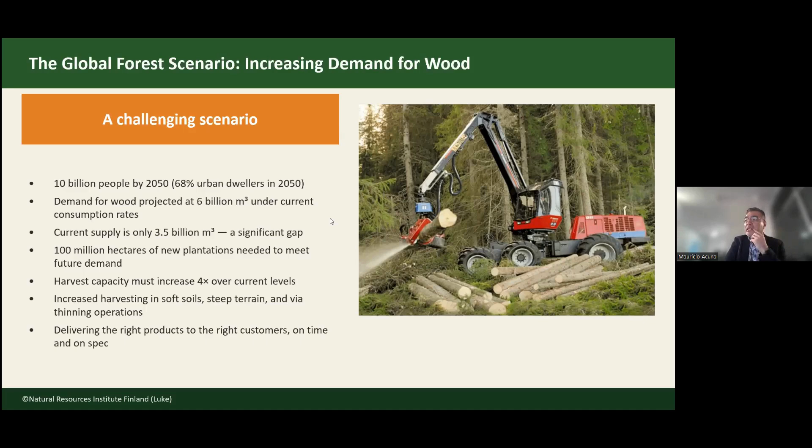We are also seeing some trends. For example, in some countries we are seeing more harvesting on marginal soil, marginal terrain, and steep terrain, and increasing thinning operations. So delivering the right product to the right customer on time and on specification is becoming even more challenging. The person driving that machine is actually making very important decisions. They have to be productive, efficient, reduce waste, and maintain the sustainability of the forest operation.

I'm not very familiar with the forests in Thailand, but in Australia we sometimes grow forests for 40, 50 years, and the challenge is how we capture that value 50 years later. So what is the current state of cut-to-length operations? Harvesters and forwarders rely entirely on human operators. They're labor intensive, sometimes inconsistent, and environmentally challenging. Forest value built over decades may be partially lost at harvest. That's why I said the job of the person driving that machine is very important.

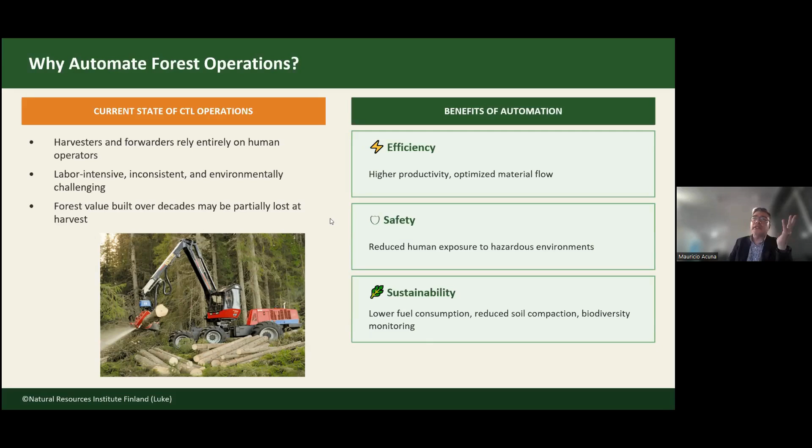So basically, the benefits of automation are exactly the same benefits as when we introduced mechanization in the Nordic countries at the end of the 60s or early 70s. We want to improve, to be more efficient, boost our productivity and optimize material flow. We want to reduce the human exposure to hazardous environments, but also from a sustainability point of view, we want to lower fuel consumption, reduce soil compaction, and improve our biodiversity monitoring.

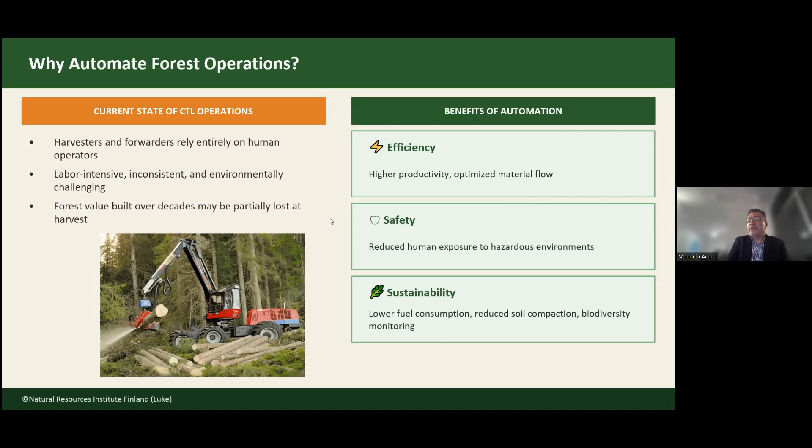And this is the situation of cut-to-length operations worldwide, globally. And you can see here that, of course, in the Nordic countries a big proportion of the operations are cut-to-length operations. We don't have Thailand here, but we can see Malaysia. I don't know if the operations in Malaysia are similar to Thailand, but Malaysia is very at the border nearly, so not a lot of cut-to-length operations.

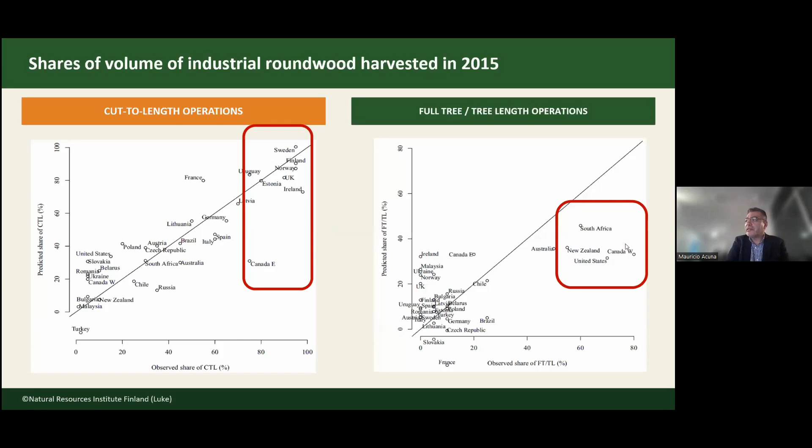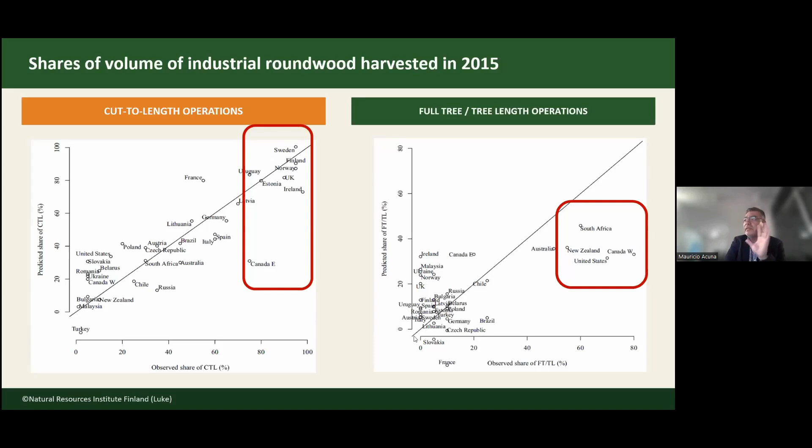And then we had full tree and tree-length operations. So again, at the top, in South Africa, New Zealand, the United States, and Canada, they use mainly full tree and tree-length operations. And again, we see Malaysia is also with some full tree and tree-length operations. Okay, but that's the situation globally about the share of cut-to-length and full tree and tree-length operations.

Now, Industry 5.0. So at the moment, we are living what is called Industry 5.0. But I would love to start with this figure because it shows how we have transitioned from the first industrial revolution in 1780 to the last one, 5.0. So you can see the first one was shaped by the use of machinery, water power, steam power. 120 years later, we had the second industrial revolution, basically consisting of mass production, assembly lines, uses of electricity.

Then only 70 years later, we have the third one, basically shaped by computer and automation. 30 years later, we have the fourth one, characterized by internet and cyber physical systems. And it took only 20 years to pass from the fourth to the fifth, which is now more characterized by human cyber physical systems. That's the current industrial revolution that we are living at the moment.

Okay, so the core principles of this Industry 5.0 or the fifth industrial revolution are human centricity, so humans collaborating with robots, not competing, getting the benefits from introducing robotics in the different production lines and systems. Resilience, so how we can use this sort of technology to make more flexible and more robust production lines. And in the case of forestry harvesting systems, how we can use this technology to make more sustainable systems, for example, with lower fuel consumption, with less waste, etc., and how we can customize solutions for different customers with different needs.

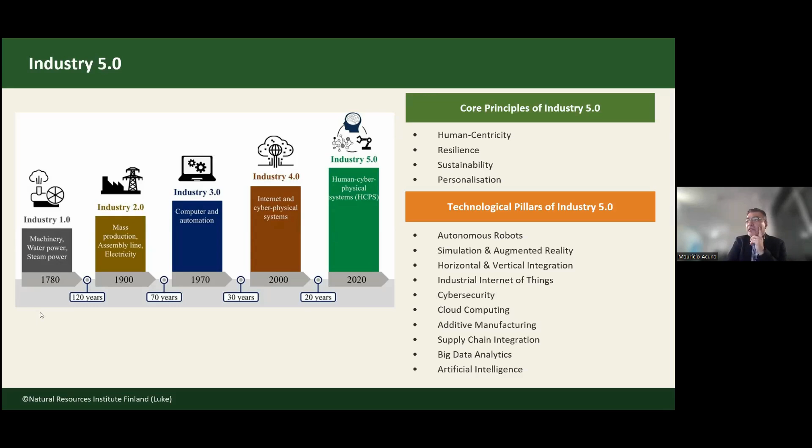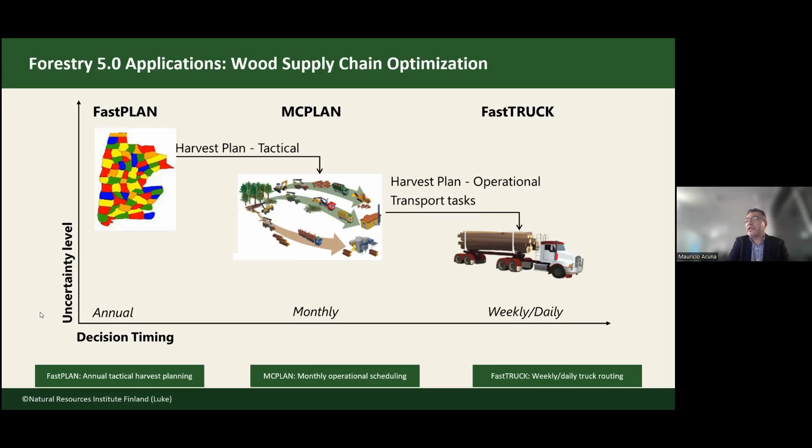And another tool that I developed when I was in Australia was FastTRUCK. Imagine you are a transportation planner. You have 50, 100, 200 trucks that you need to route on a daily basis. So you need to send those trucks to different coupes, to different forests, and then to different mills, in an efficient way. So at the minimum cost and satisfying all the constraints. For example, truck drivers cannot drive for more than 10 or 12 hours. Some mills are open only for a few hours. Other mills are open 24/7. So you need to satisfy a number of constraints with those tools. And here we have more information about the different tools.

So again, FastPlan: we are maximizing net present value because we are optimizing the cutting of those forest coupes, but also we are optimizing forest roads, when the roads should be built or improved to move the timber from the different coupes to the different mills. So you see here, the decision is when to harvest each stand or coupe. And the solution technique is a quite advanced meta-heuristic called threshold accepting.

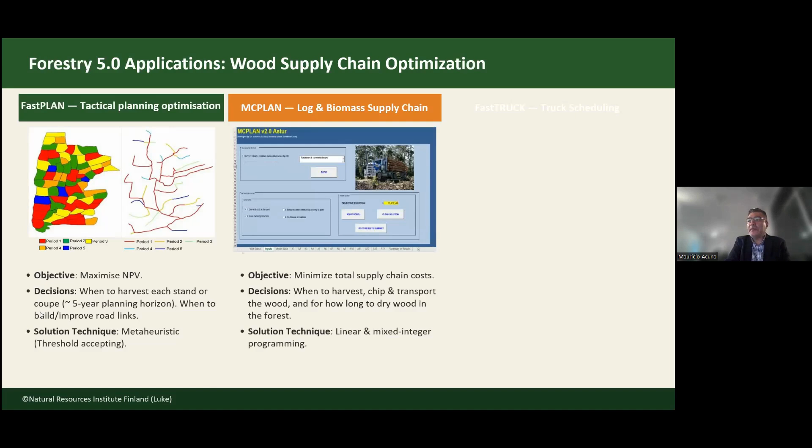This is the interface for MCPlan. This is an Excel-based tool. And here we want to minimize total supply chain costs. The decisions are when to harvest, when to do the transport, and for how long to dry the wood in the forest.

And the solution technique is linear and mixed integer programming. And FastTruck, that's the interface. And we want to minimize costs or empty truck distance. There are different metrics in transportation. Decisions are how we allocate the trucks to different transport tasks, and the solution technique is simulated annealing, which is

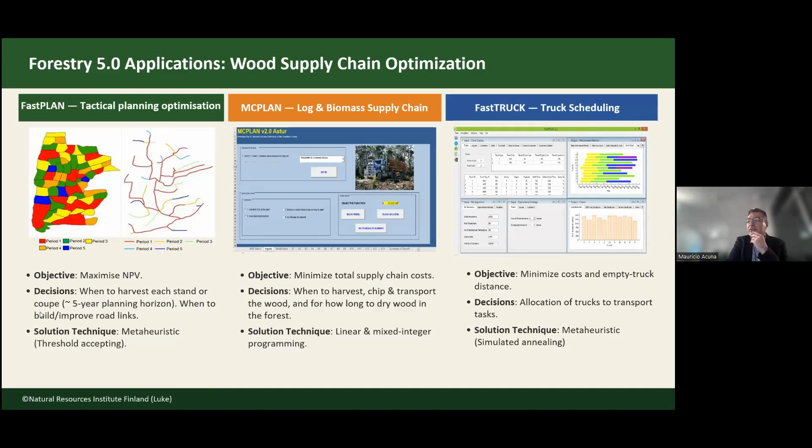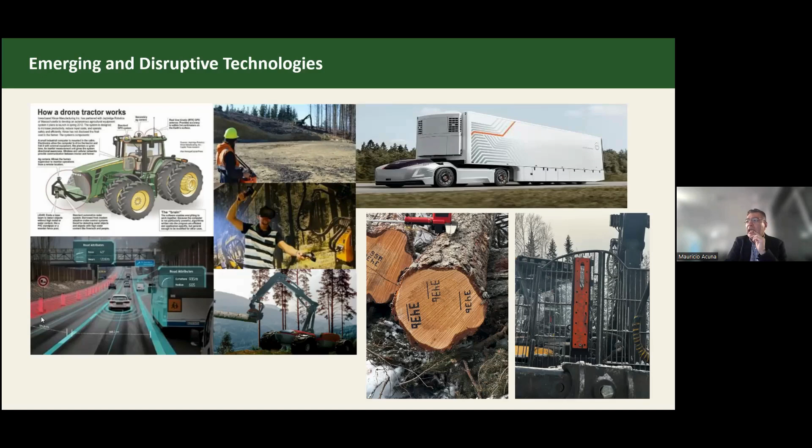But also a few weeks ago I went to Sweden to see a new system for tagging logs. This is a digital printing system. The difference is that it could be located on a forwarder. So basically, when the operator grabs the logs, he can tag the logs in the forwarder. And this information could be added to the HPR files. So you know exactly where the log was tagged, you know the location, and then you can identify different logs when they arrive at the mill based on that information.

But before the company purchased those systems, I offered a different approach, a different solution. I said, let me fly a drone to see if I can get a 3D map of the logging trucks, and if I can do the same job. I was able to do the same job. Unfortunately, my system wasn't in real time. The company needed something in real time, very quick.

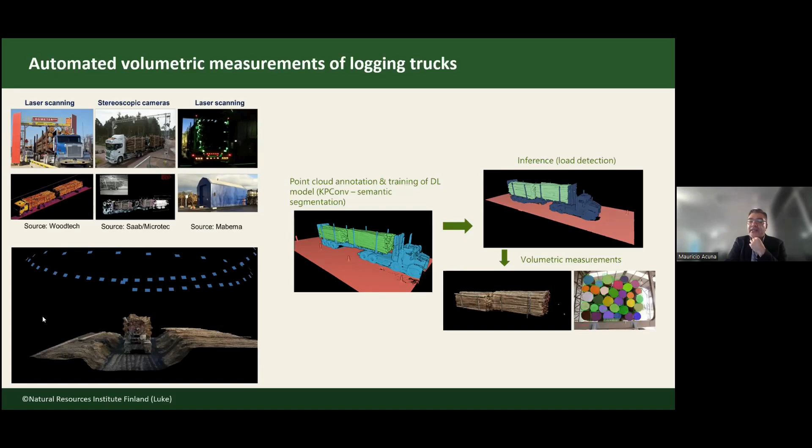But at the moment we're writing a paper with my PhD students, so we are now using deep learning to identify logs from point cloud data, as you can see on the right, and now in a few seconds we can identify the logs and estimate solid volume and gross volume using deep learning and point cloud data. So we are moving quite well and quite fast in that field.

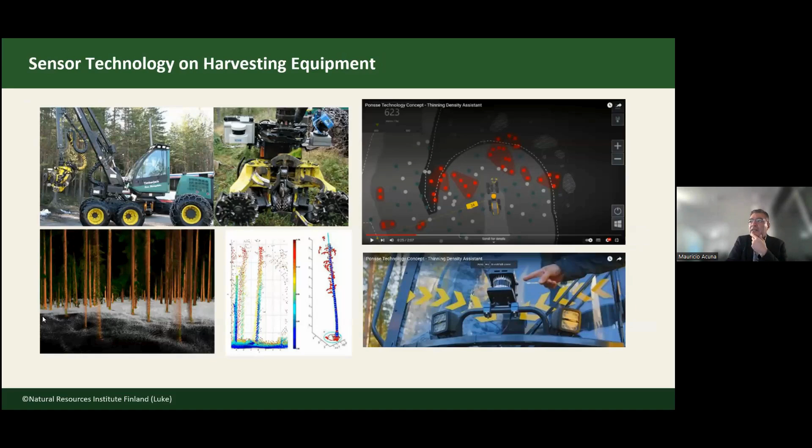So we purchased the Kudan system, and we put the LiDAR sensor on the machine, and we've been able to do this kind of thing. Of course, we are a bit behind the commercial systems, but we've been trying to do something similar in our own research. But also we propose a second approach.

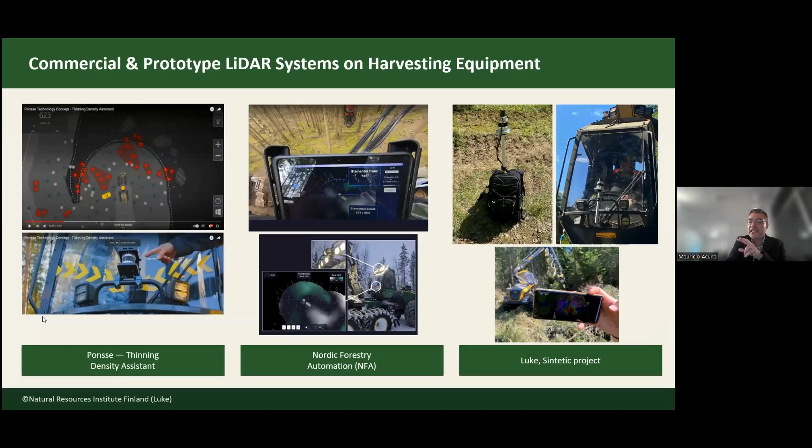This is real time, and you can imagine doing things in real time is quite challenging. You need to do the scanning, process the data. By the way, these systems don't optimize. They just present information to the operator, but they don't optimize the tree selection. So we proposed something different.

So we propose a system where you pre-scan the forest, you go to the office, you do the optimization, you determine which trees should be removed during the thinning, and then you optimize the thinning solution, and then you pass the solution to the operator. So then the operator goes to the forest with that optimal solution. In the forest, you just put the solution on a screen, and he can see the optimal solution.

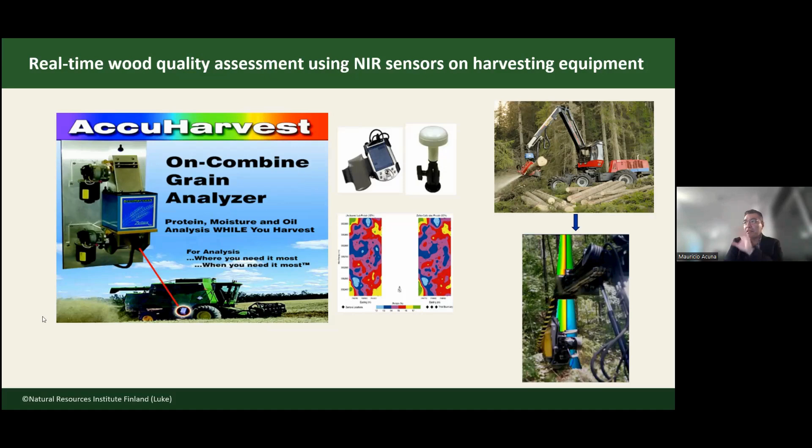And because the machine comes with a GPS, you can create maps based on your variable of interest, for example a protein map, a moisture map, or an oil content map. In my case, it was going to be a wood density map: a harvester with a near-infrared sensor in the harvesting head, collecting the wood chips and getting the spectral curve. In the end, I was able to predict wood density at different heights of the stem, so I was also able to optimize the bucking of the stem using that information. It was the same sort of concept, but the inspiration came from that machine.

Just to finish, what are the key drivers for adopting these fifth industrial revolution technologies? We are facing labor shortages and an aging forest workforce. There are rising operational costs that demand efficiency gains. There are stricter environmental regulations, and consumer and supply chain sustainability requirements. There is a need for competitive advantage through data-driven decisions, and for improved safety records and reduced workplace injuries.

We haven't talked too much about barriers, but people from the industry, from the companies, always ask me, where are the barriers? And there are some barriers. Of course, this is not free if they want to implement these technologies. There is sometimes a high upfront investment in hardware and software, and you need connectivity. Sometimes people don't like changes, so you need to really educate people about the changes. And sometimes there is a steep learning curve for operators and planners.

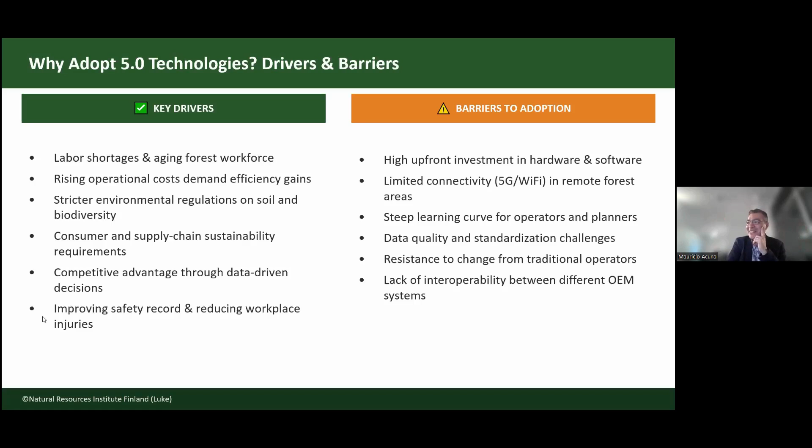There are some data quality and standardization challenges. That is not trivial. Sometimes people don't want to share data. That's another issue. There is resistance to change from traditional operators. As I said before, they don't like changes. They don't want to do something different. They've been working the same way for 30, 40 years, and now you want to make a change. So that's challenging. And then there are the more technical issues with interoperability.